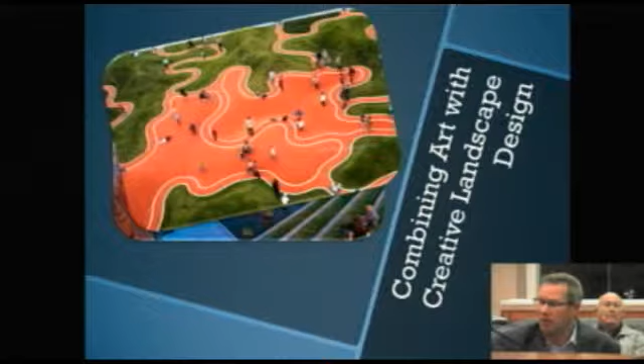Combining art with creative landscape design, combining art, unique recreation equipment, and creative landscape design in city parks and open spaces creates a memorable place for events and activities, which we now understand as placemaking. Spaces like these could further help define Bowie, Maryland.

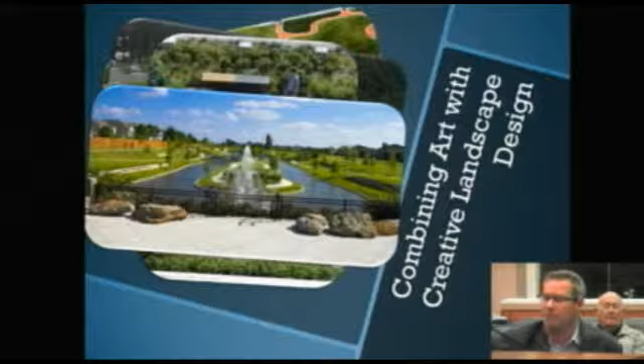So the information that I attempted to provide in this presentation is really just meant to encourage dialogue between council and staff, so that a basis of design can be established as a guide when working with architects and to design our park master plan elements. This approach would ensure a consistent implementation of our park development elements.

So why? We're at a point where decisions soon need to be made regarding the type, style, and design of various elements in our parks. In particular, our amphitheater, our restroom concession facilities, and our pedestrian plazas, as defined in our Allen Pond and Whitemarsh master plans. We've recently hired architects that are going to be working with us on looking at developing these areas, and we need to give them some of our basis for what we want them to design.

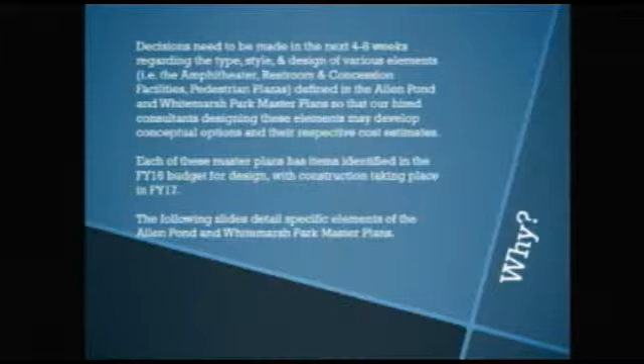Each of these master plans has items identified in the fiscal year 16 budget for design, with construction taking place in FY17. So the following slides detail specific elements in both of the Allen Pond Park and the Whitemarsh Park master plans. I don't know if you've had a chance to refresh yourselves on those master plans. They're quite extensive and they can be somewhat boring and daunting, but they are very important to creating these spaces in our parks and making sure that Bowie parks can continue to thrive.

So now we'll move on quickly to the second part of the presentation. There's no more fancy, well, there's a few more fancy photos, but so where we are with Allen Pond Park Master Plan. In FY16, we're going to be working with an architect to design Parking Lot F.

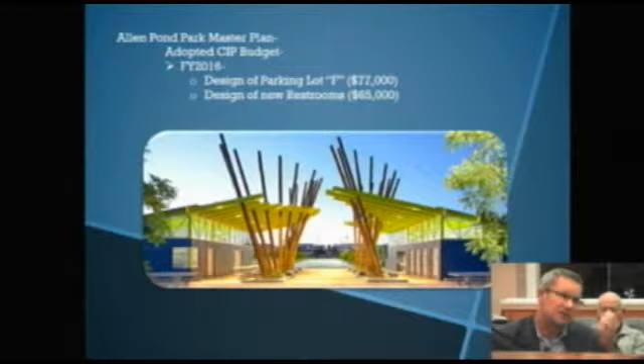So we're also looking at the design of the new restrooms that'll go in Allen Pond. Here's a fairly simple restroom facility, but you'll notice it does have some artistic flair to it. It makes it kind of stand out, gives it a little pop and sizzle. Then, of course, you can get to this one here. This is a restroom and concession facility in California that was recently built. Uses a lot of natural light, very environmentally sensitive and sustainable structure.

Then, of course, as you know, we're going to be looking at the design of a new amphitheater and the site that goes with it. And that's one component that I think we need to focus on: you're not only building a restroom and building an amphitheater, but you're figuring out the space around it. And how do you make that space work for the activities that we plan to program there?

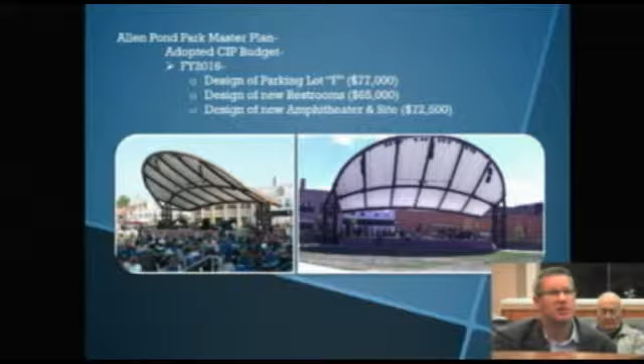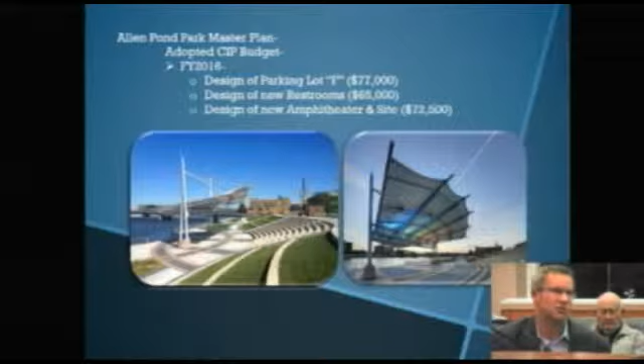This is an amphitheater very similar in size to the square footage of ours. This one's in Wisconsin, in Wausau City Square. Another option would be this one. This is one that's in Riverdale, Georgia. And then, of course, you have this one in Waterloo, Iowa. Waterloo, Iowa is very similar to Bowie in a sense, slightly larger population, 68,000, but waterfront type of situation, very similar to Allen Pond.

We really do like the look of these tension structures, and it's something that's become very modern now and very cost effective in municipalities.

You know, maybe they want to be on their tablets or phones, and they might have their neighbors just go down and meet for a cup of coffee. It's an inviting space.

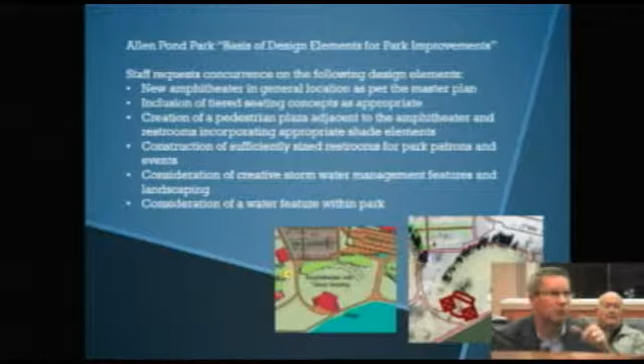So on to Whitemarsh Park. Well, actually, we'll go back. So for Allen Pond Park, we're talking about a basis of design elements for park improvements.

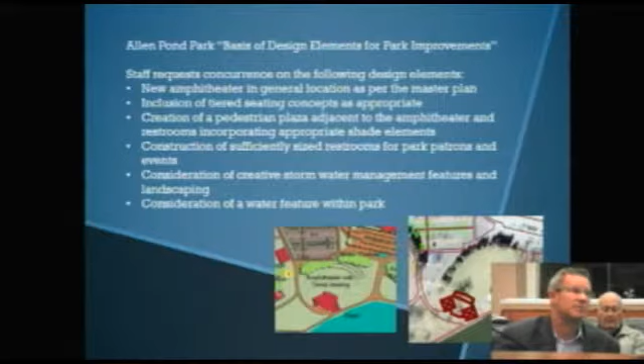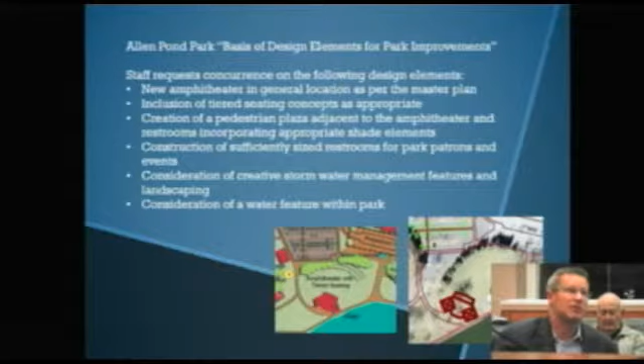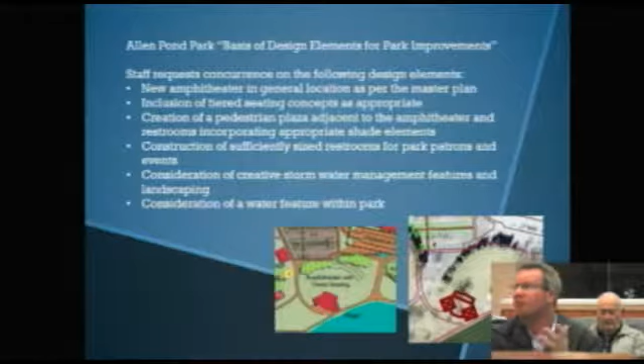Staff was looking for some concurrence from council with the following design elements: obviously the new amphitheater in the general location the master plan has it, inclusion of tiered seating concepts as appropriate, and creation of a pedestrian plaza adjacent to the amphitheater and restrooms, incorporating appropriate shade elements. I think no one would disagree that at our events at Allen Pond, a lot of people end up underneath the trees and at the back of the hillside because they're trying to find shade. If we develop these areas and the amphitheater, we should make sure we're providing that shade so residents and visitors are right front and center.

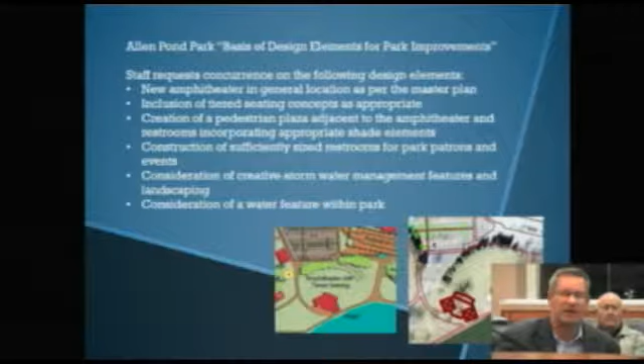We're also talking about construction of sufficiently sized restrooms for park patrons and events, consideration for creative stormwater management features we had talked about, much of which will probably be required, and consideration of a water feature within the park.

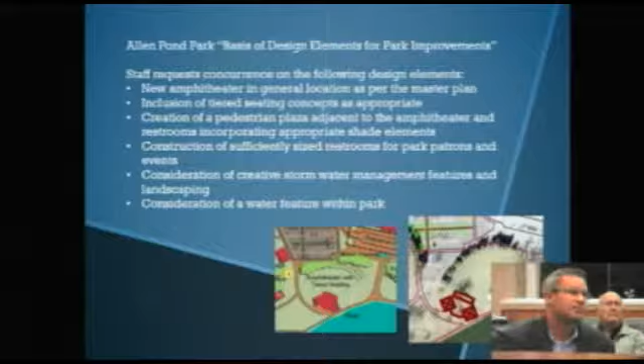Now we'll jump over to Whitemarsh. In 2015, we had funding to come up with some conceptual designs for the restroom concession facility, and we'll show you the final conceptual design. In the current 2016 budget, we're looking at design of parking lots A, B, and E. They probably don't mean a whole lot to you, but in Whitemarsh Park, B and E are the major gravel parking lots, and A would be a whole new parking lot to the far west of the park that would be constructed.

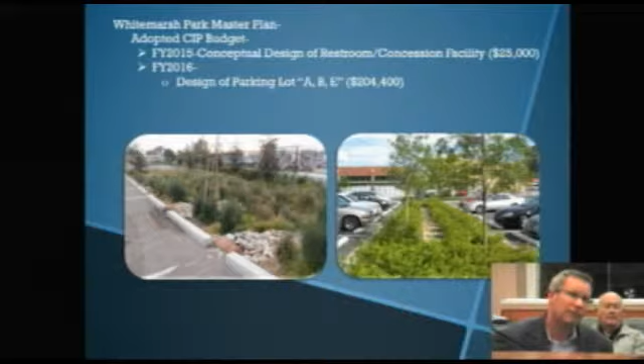Again, these are the same photos, but we would look to hopefully utilize some creative stormwater management techniques there, most of which will be required, but if nothing else, they also provide some aesthetic appeal.

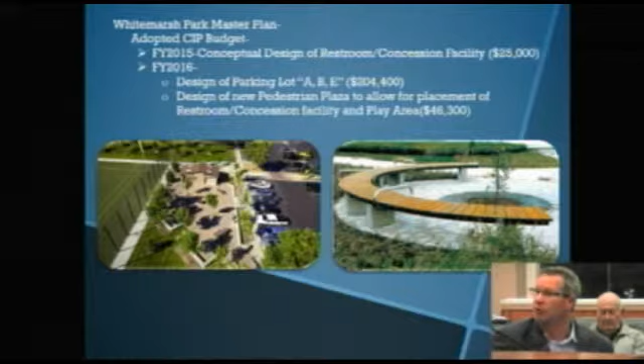On the right-hand side, it's just an artistic element of a bench. If you incorporate some uniqueness in the seating areas within these public spaces, I think you're going to find that you're going to hold people longer and they're going to create that placemaking experience. That's the conceptual design that was developed initially for the restroom concession facility at Whitemarsh.

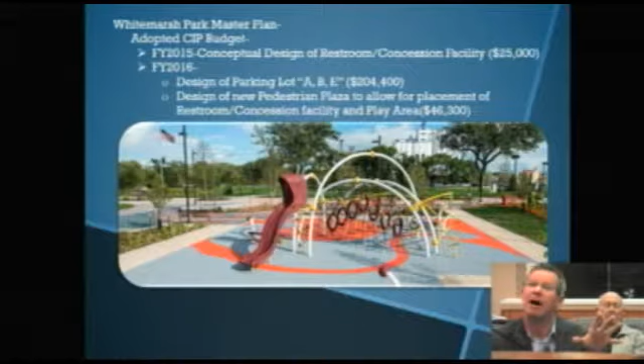Here's an example of a non-traditional style playground. It's not post and deck, it's not glass fiber reinforced concrete, but it's a whole new innovative and modern design in playground structures. You can see from this one, this keeps kids climbing for hours. They can get lost in that thing for hours. I could get lost in that thing for hours.

2017, construction of the pedestrian plaza to include the restroom concession facility and the new play area. So those were just some of the photos that we would hope to include when we get to the design of this particular pedestrian plaza and the restroom concession area.

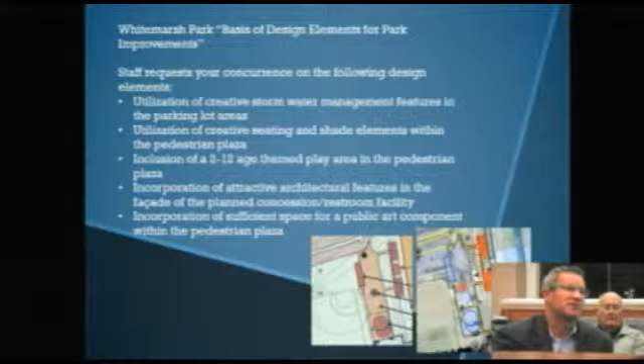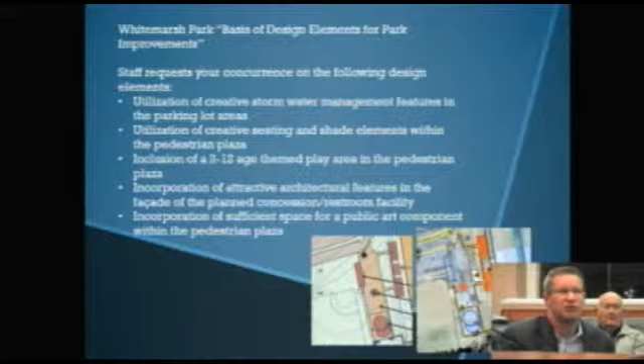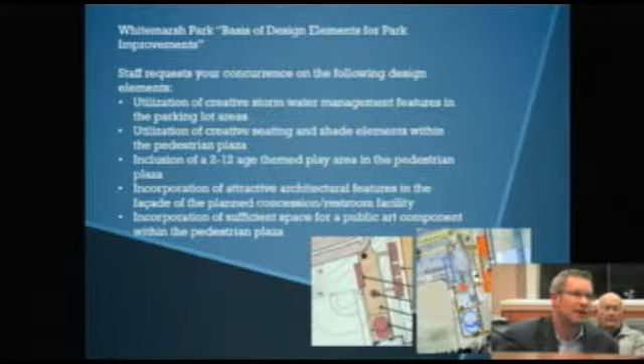So again, we're looking at the basis of design elements for these park improvements at Whitemarsh. We're looking again for concurrence for the utilization of creative stormwater management features in the parking areas, utilization of creative seating and shade elements. We're looking at the inclusion of a 2 to 12 age themed play area in the pedestrian plaza. We're looking at incorporation of attractive architectural features in the facade of the planned restroom concession facility.

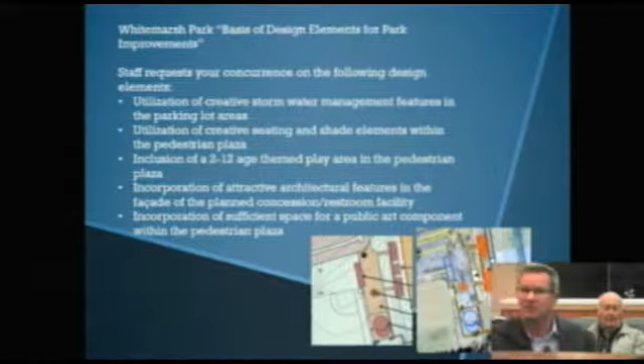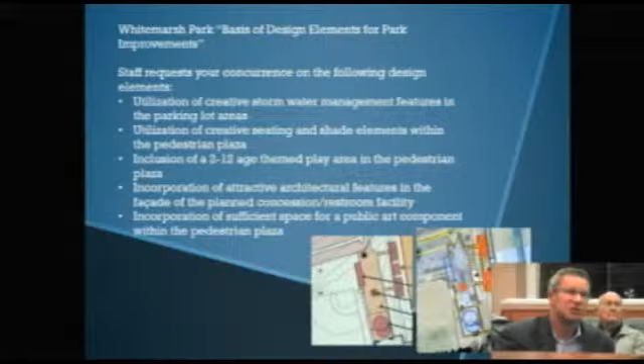A lot of times does it cost a little bit more to do that? It does, but does it bring a sense of personalization to that space? It does. Incorporation of sufficient space for public art within the pedestrian plaza. So those are just some of the basis of design elements that we were looking for.

So that's it. I want to thank you for your time this evening, and we'd be happy to answer any questions you might have on these master plans or the presentation. Thank you. Mr. City Manager.

Thank you, Mayor. Thanks, Matt, for the presentation. I think it's thought-provoking and asks you to look at parks in a slightly different way than we've typically done that. You've included a significant menu of options and choices, really, already in the capital improvement program. You have a history of that. You continue that in the budget review this past April, and we provided you copies just to tie it into Matt's presentation, which referenced them.

Some of these are big ticket items, there's no question about it. We've been struggling with the amphitheater, for example, for years. Matt referenced some of these fabric structures. Those of you who've gone to the Eastern Shore see the Sailwinds Park at Cambridge when you come across the Frederick Malkus Bridge there over the Choptank. That's been there probably 10 or 15 years. It's a pretty decent looking structure and has held up well. So I don't think you necessarily need to replicate what we have now, but you want to continue with that kind of amenity to provide a focus for community events and performances.